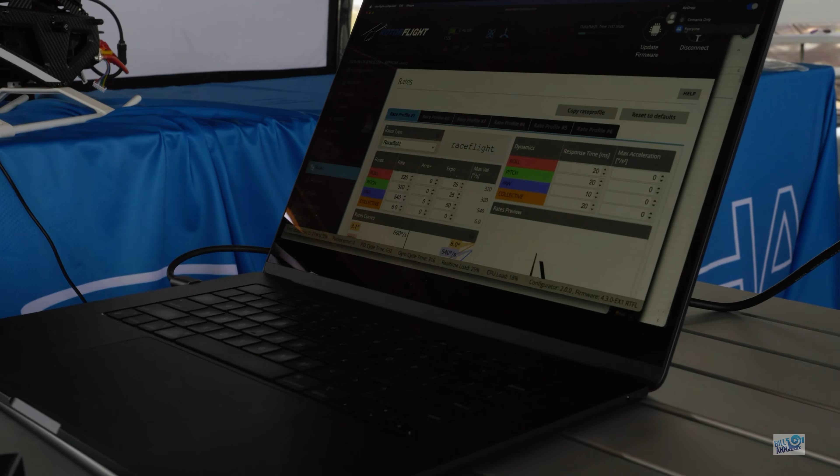So for the filter section, I just want to do a quick recap, if we actually have the time, because not everyone has seen the video and filter setup is very important. I'm just going to airdrop a little video over here. Not a video, a log. Robert's laptop, very good. And we're going to look at that log in the Blackbox Explorer, if it airdrops.

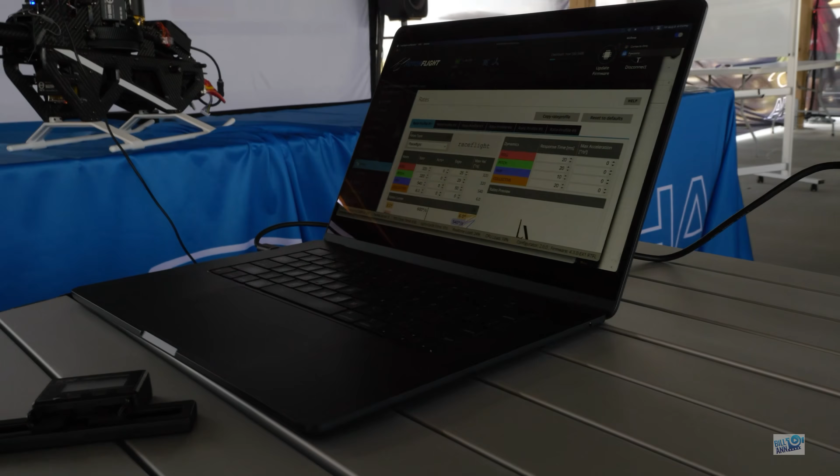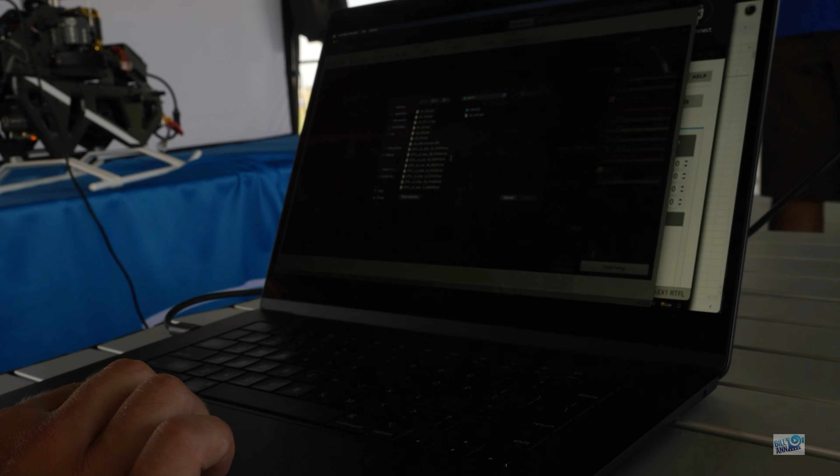Oh yeah, you need to accept it. Just like I said, this is kind of freestyle. Okay, can you open the Blackbox Explorer, please? Then I can quickly show them. Yeah, very good. Got it? Yeah, there it is. Cool. Can I pull this? Good. Okay, oh yeah, you already have things configured here. So I'm just gonna open the log that I just airdropped. Where is it? I would say don't disconnect it yet. Here, vibration. Okay, so filtering. Oh, I just dropped the thing.

I'll go fast. Okay, so the entire point of filtering, why are we doing it? You have a gyroscope in your helicopter and that picks up rotation rates. Pitch, roll, yaw. I actually brought my little M2 Evo to demonstrate this. So you have a gyroscope that picks up pitch, roll, and yaw. The annoying thing about this is it also picks up vibrations from the main rotor, from the tail rotor, from the motor, from the gear train. And these vibrations do not contribute to flight performance, so we want to get them out.

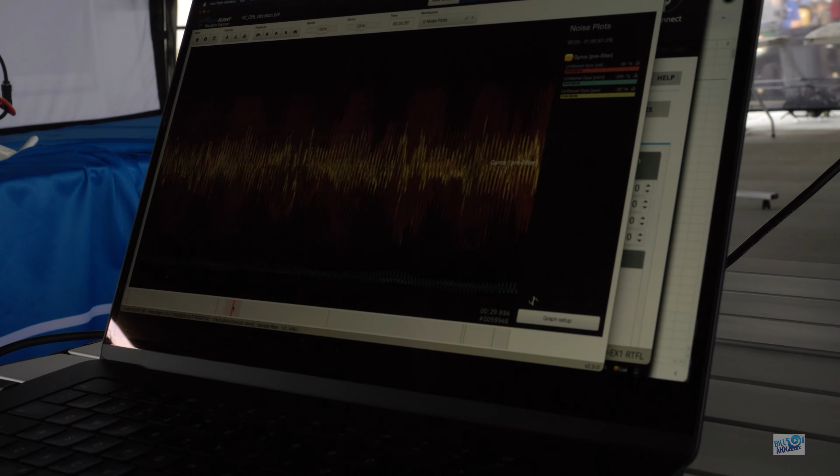I am just going to stick tracking. This should have what I need. I'm just going to show you. Okay, so we are going to look at our pre-filtered gyros. Just want to show you what this looks like. So this is a flight that I did where I just flew. And you can see, maybe, that this is very, very noisy. You can see the yellow trace. It goes up and down and up and down.

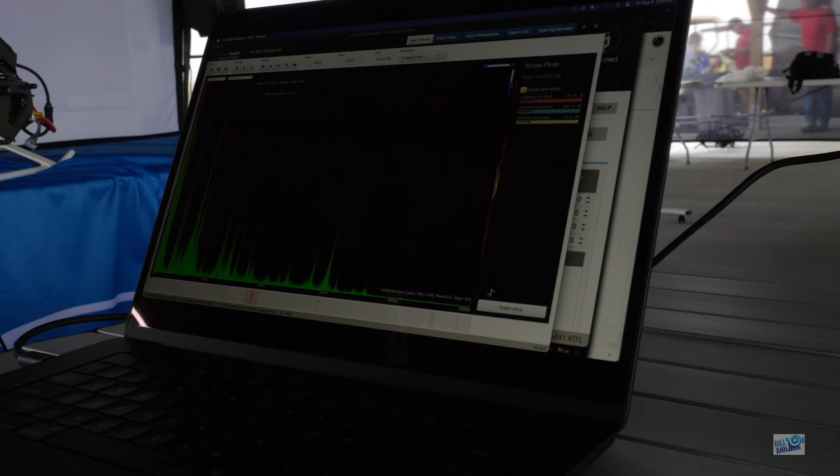If I actually click this, I get this. It is kind of hard to see. I will try to scale it up a bit for you. You can see all these peaks. These peaks right here, they're all vibration. Some from the main rotor, some from the tail rotor, some of other things. And the idea now is to reduce these to zero.

So if I just add the filtered gyros, I can show you what it should look like after this. You can see all the peaks are gone. And that is the idea behind filtering. We're leaving all the flight movement in the gyro signal, and we are removing all the noise. I explained this a bit more in depth in my video.

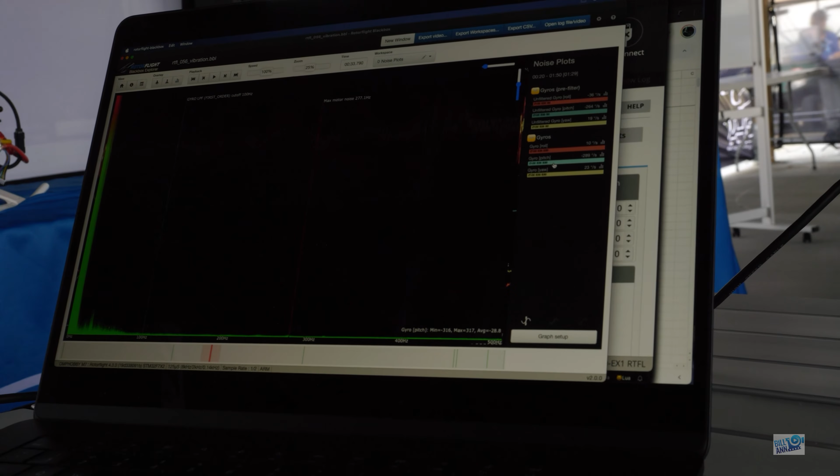All you need to know is if you have a helicopter that has a main rotor and a tail rotor, you come into the gyro tab and you're going to basically do what's already done here. You want a general low pass. A low pass is a type of filter that just cuts off vibration above a certain frequency. So for example, you have a, I don't know,

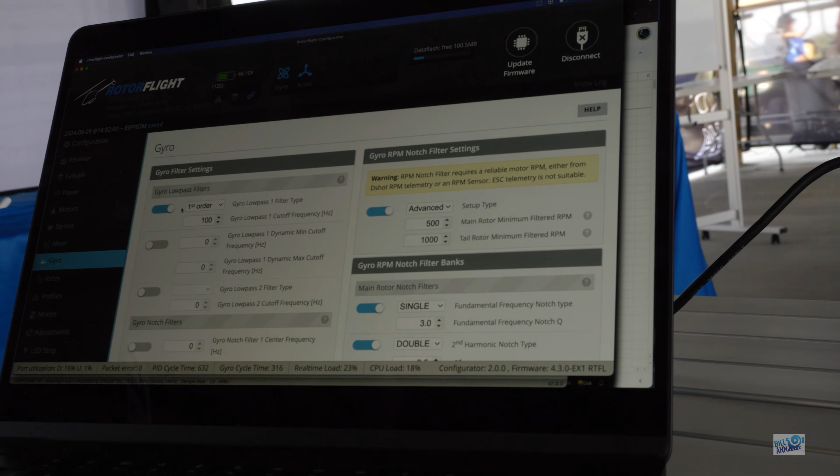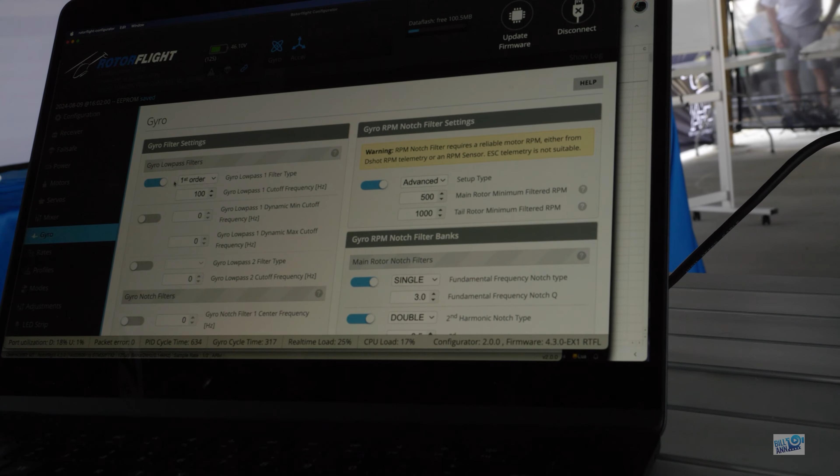0 to, say, 15 hertz range of flight vibration. Then above that, somewhere starts the main rotor, maybe 30 to 60 hertz. And then the tail rotor starts at like 100 hertz or something. And this just cuts off all high frequency vibration that you don't want. So if we, oh, he has all that stuff disabled. So I'm going to go back manually.

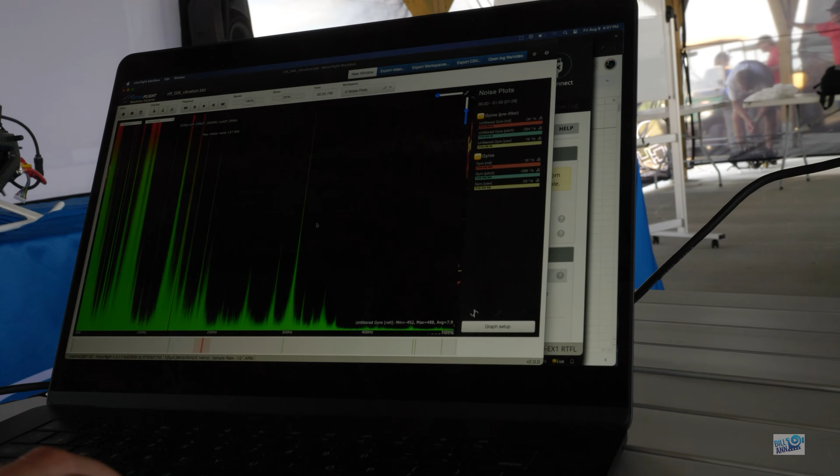So in the frequency range, you might just cut off maybe, yeah, here, gyro low pass filter. Everything behind this line will be cut off. It is a bit more complicated than that, but you can imagine it like this. Then we have the dynamic notches.

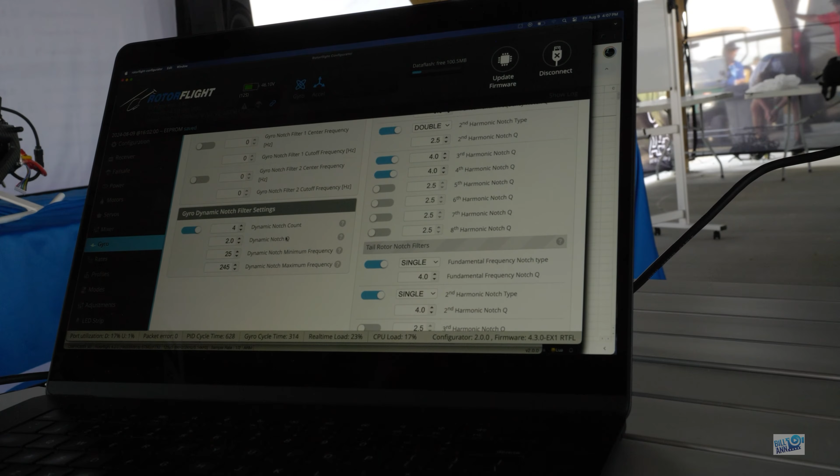Dynamic notches, they're neat because they actually seek out frequencies that stand out the most, lock onto these, and filter them out. The defaults of 4 notches at a Q of 2.0, that's amazing. You can leave that in. Nothing needed to modify here.

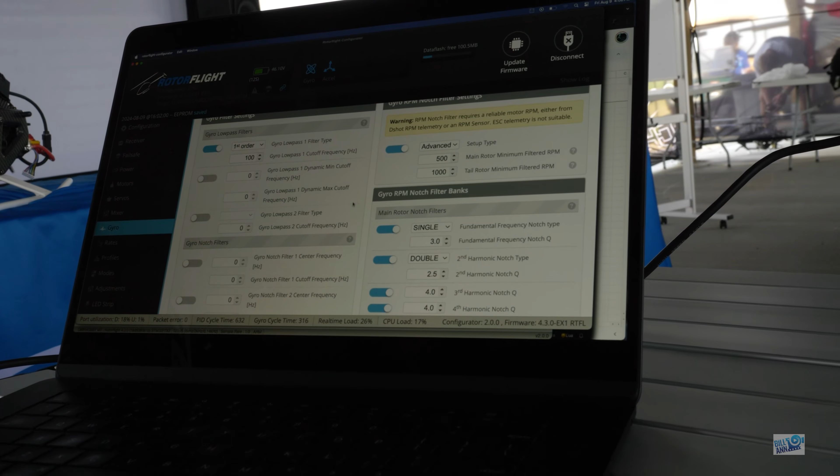Now, every modern ESC delivers an RPM signal. That is a neat little wire that comes from your ESC, plugs into the flybarless unit, and tells it how fast the motor is spinning. And the thing that Bob showed earlier, where you set the gear ratios, that also tells the system how fast my main rotor is spinning, how fast my tail rotor is spinning.

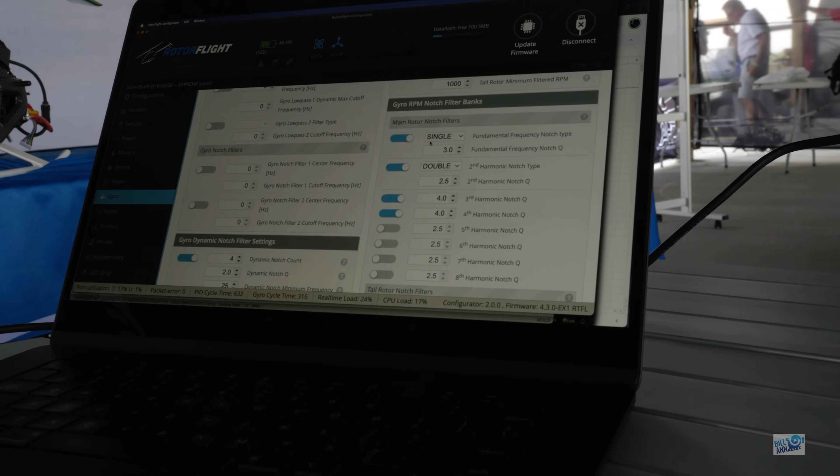And based on that, we can also filter these vibrations out. So what we have here are RPM-controlled notches. Main rotor fundamental frequency notch is the 1 per rev vibration of the blade of the main rotor. For example, if one of your blades is a bit heavier, that is going to create a vibration that comes around once per revolution of the rotor. That filters that one out.

Below that, you have the second harmonic. The second harmonic is cyclic resonant flap. So if your blades flap up and down during the revolution, it filters that out. That is actually one of the main contributing factors of helicopter noise. Third and fourth harmonics are just different bending modes of the rotor blades. It doesn't really hurt to enable these. Most main rotors will show a third and a fourth harmonic, so just turn these on and you will be fine. That's these 4 here.

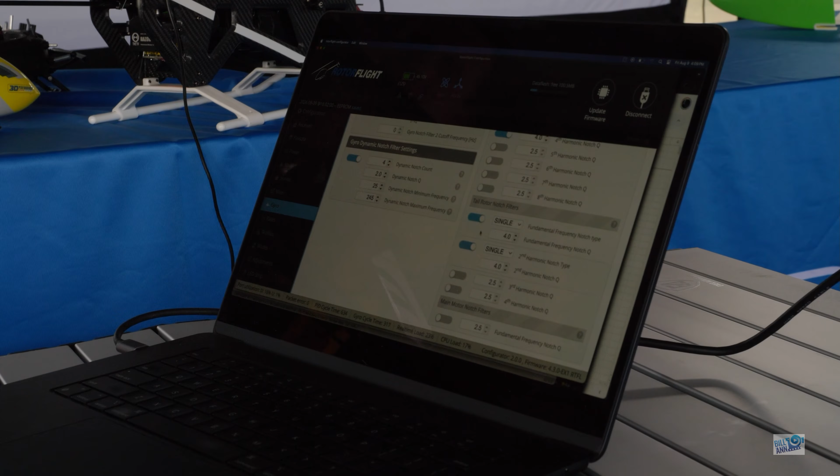Then you have the same for the tail rotor. The tail rotor, as I said, is higher in frequency. For this example, on the M7, it is 5 times faster than main rotor, so the frequencies are 5 times higher. You can just turn on the first and the second notch, and it'll take care of this.

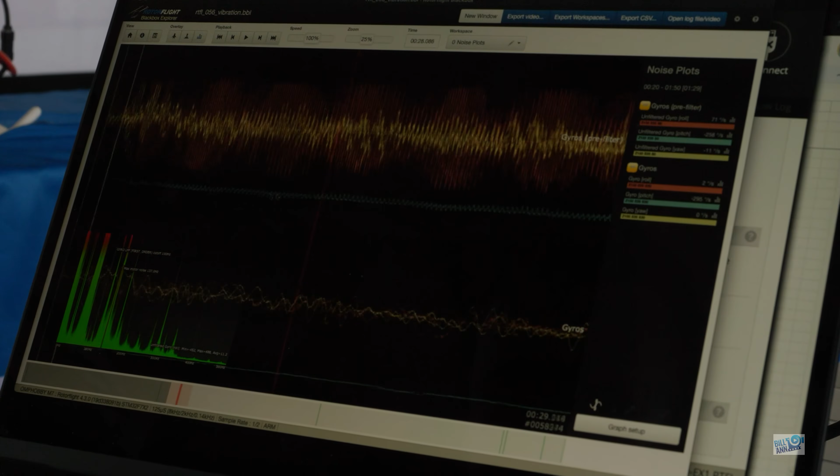How you can test this is by just going up and doing a flight with logging. And in the log, you're going to look for continuous flips. So you want to do continuous flips. You can then limit the range with I and O. And then you will get a vibration spectrum that shows you what your helicopter is doing in continuous flips.

You probably cannot see this very well. We have 100 hertz here, 200 hertz here, 300 hertz here. Everything that is really important to this is below 100 hertz. So I'm just going to scale this over a bit so you can see it better. Now the maximum is 167 hertz.

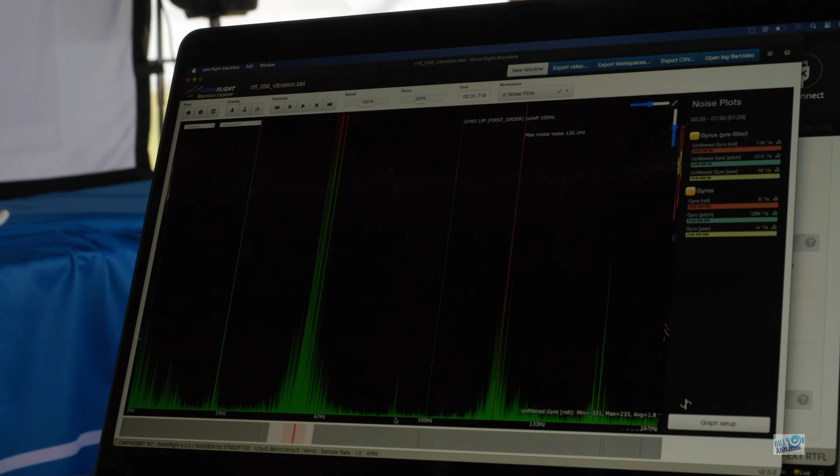You can see one peak, that is the main rotor fundamental vibration. This wider peak, I hope you can make it out, is the second harmonic from the resonant blade flap. Here is the third harmonic, this is the fourth, and here starts the tail rotor. And after filtering, it should look like this. All the peaks are gone, and you should be good. If that's the case, we can continue on to PID tuning, which is probably why most of you are here.

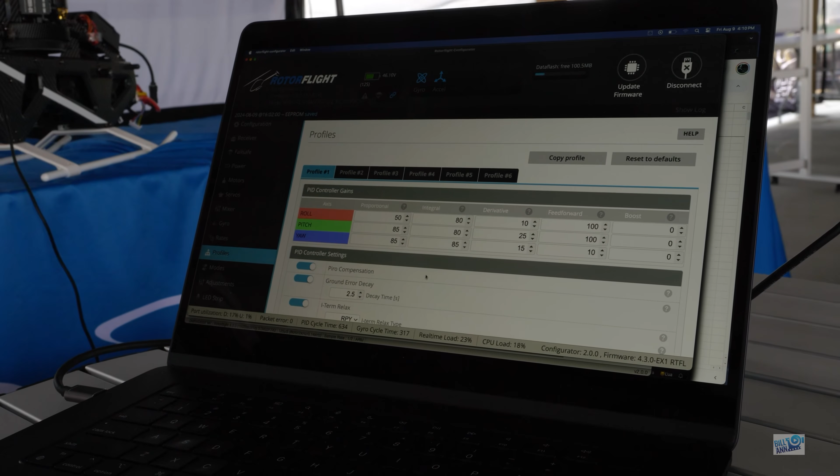PID tuning starts in the Profiles tab. You have this menu. It might look intimidating at first, but it really is not. I have 5 minutes to do this, oh boy. I'm going to show this up here. You have proportional gain, that is your P gain. You have integral, that's your I gain. You have D gain, you have feed forward, and you have boost. One more gain that you will need is the high-speed integral. That is down here. It is not in the main section. We'll also need this.

Okay, so what do these gains do? The P gain is a general correction. It looks at the rotation rate of the helicopter and counteracts that. The I gain is an integral of that. Integral means it looks at the angle. So for example, if the angle of the helicopter is 30 degrees off, it gives an amount of correction X. If the angle is 60 degrees off, it gives double that. It's proportional to the angle of the helicopter.

D gain is a derivative of the rotation rate. So it looks at the acceleration of the helicopter. Helicopter is hovering, nothing is happening. Helicopter is rotating, nothing is happening. But as soon as you give an input that changes the rotation rate of the helicopter, for example, from a hover, you accelerate, or from a rotation, you stop, the D gain counteracts that. Why is this important? Because it acts as a damper on the helicopter.

Feed forward is pretty simple. If you give an input, it just puts that input right through to the swash without any control logic. Boost is basically a derivative of your stick. So if you move your stick, it gives a little boost to the swash plate so the reaction becomes sharper.

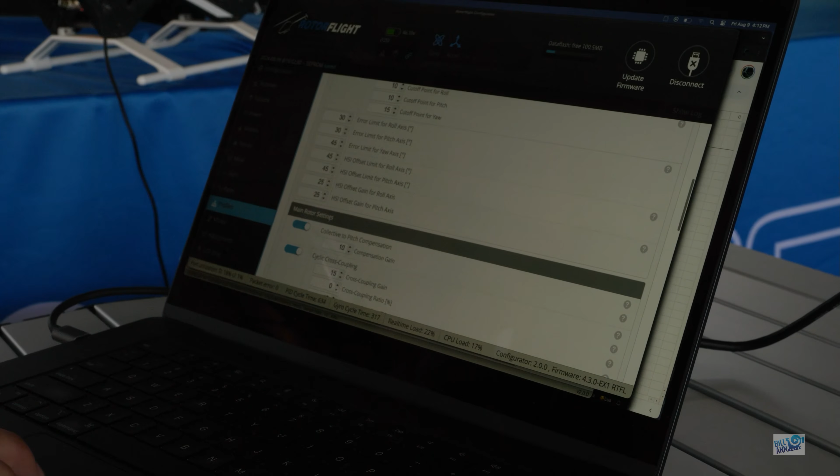And the high-speed integral, which I mentioned earlier, is especially important for fast flight. It basically makes it so that if you fly fast and give big collective inputs, the helicopter does not get into a porpoising motion, but climbs and drops in a straight line. So, how do you tune this? Because this is the most crucial part.

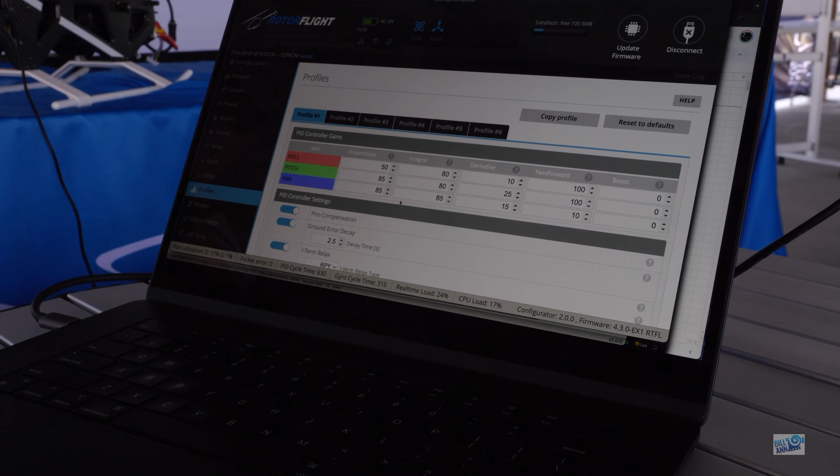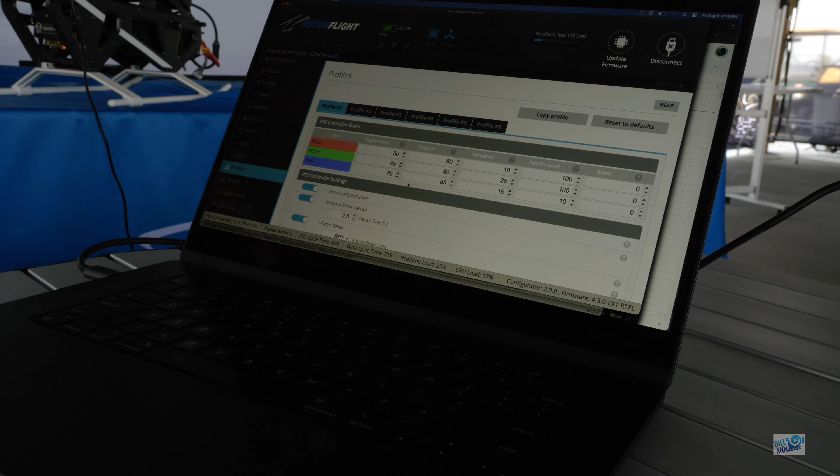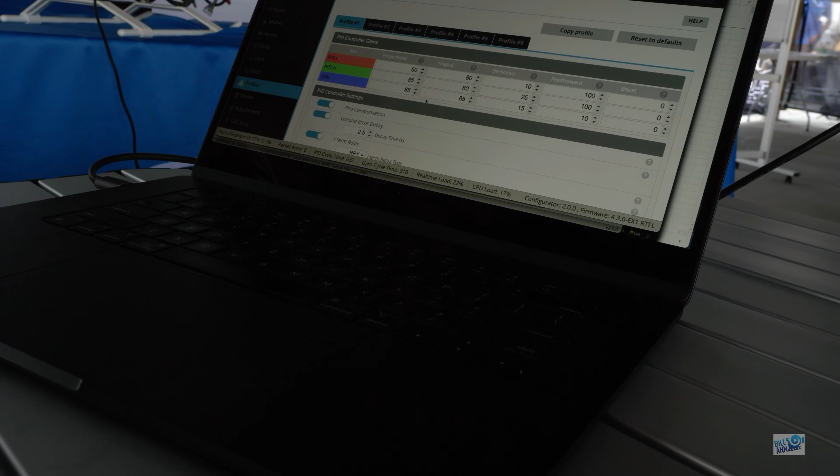From the defaults, you will have D, I think, 10, 20, I don't know. These will be too low to fly, so you raise them. How far do you raise them? Assuming your filters are good, you can raise them to like 60, 70, 80. And by the point you're there, what you want to do is you want to simply climb and pirouette to the right. And if the helicopter starts shaking during that, you back off a little.

Why do we do this? By climbing, we increase the inflow of air into the disc. That in turn increases the aerodynamic gain of the rotor blades, makes them more agile. So any overgains will show up first in maneuvers like this. And also because we're yawing right, we're increasing the rotor RPM because the governor does not know we're yawing. So that will tell you your maximum D gain.

While you increase your D gain, you will notice that from being very wobbly, like defaults on Rotorflight will not stop well on the elevator axis, it will go to being more crisp and not wobbling as much. And then it will become slower to react. That is okay, we're not done yet. So once you have found your maximum D gain, climbing up, it starts to wobble, back up 10, 15 points until it doesn't do it anymore.

We are going to tune feed forward. Why? Because we now have a flyable helicopter, and feed forward plays a crucial role in how the control system reacts.

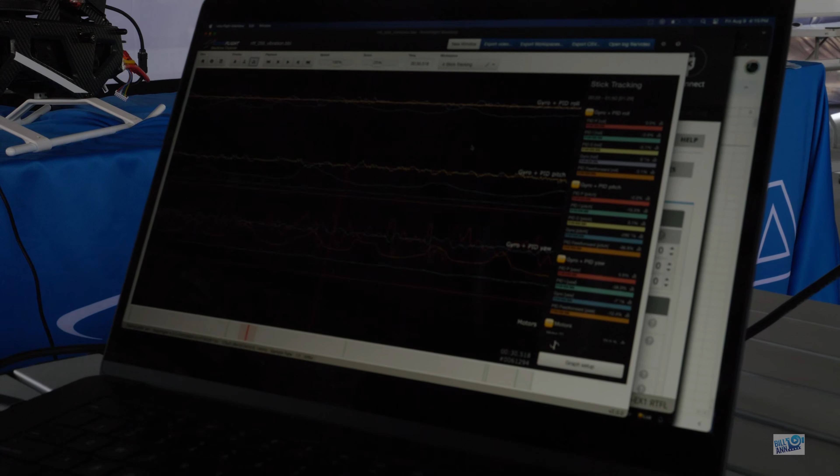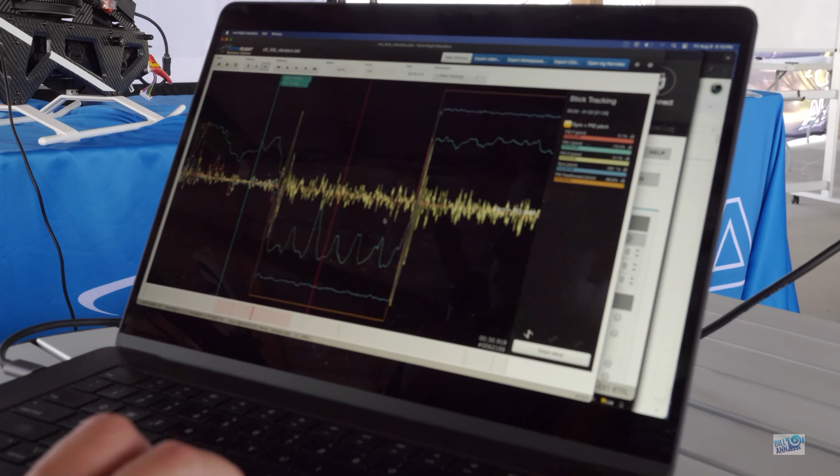Nope, you're not turning off on me now, because I need this one. Let me see if... stick tracking, yeah, that is the one I want. Okay, I just need a section of continuous flips again. Let's say we do the pitch axis. Okay, this is pretty zoomed in. Let me zoom out. Okay. You barely can see this, but if you look right down here, there's a trace. Maybe you can see this.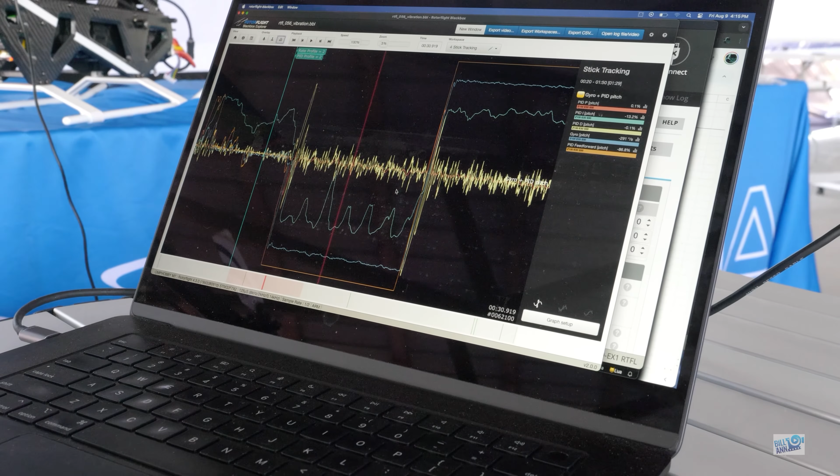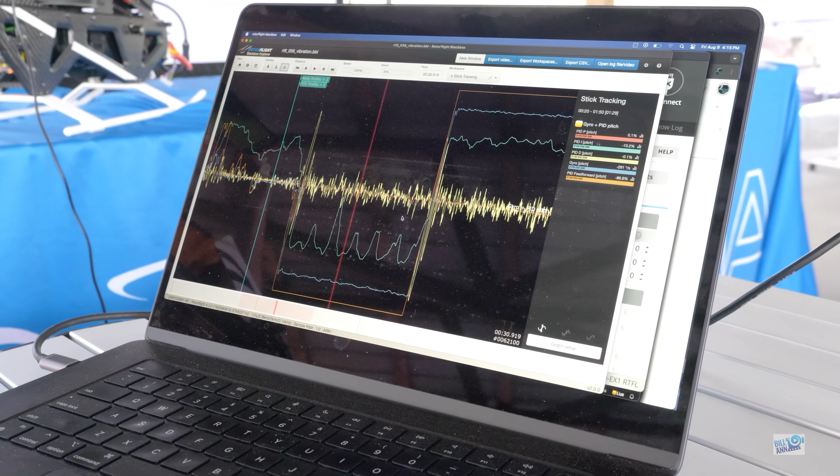That is my integral. We remember the integral looks at the angle of the helicopter and corrects it if the angle is not correct. So what do we do with our stick? We command a rotation rate. Or in other words, an angle change. So this integral wants to act if the helicopter does not rotate the way we want it to. There are some drawbacks to having the integral charge when we give inputs.

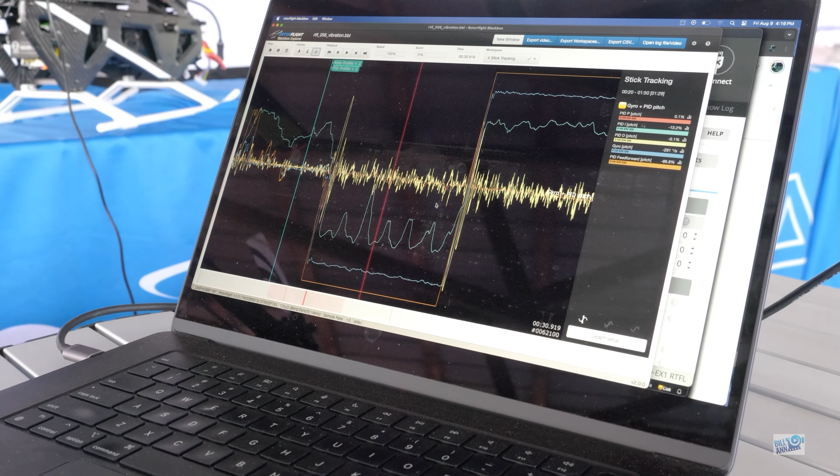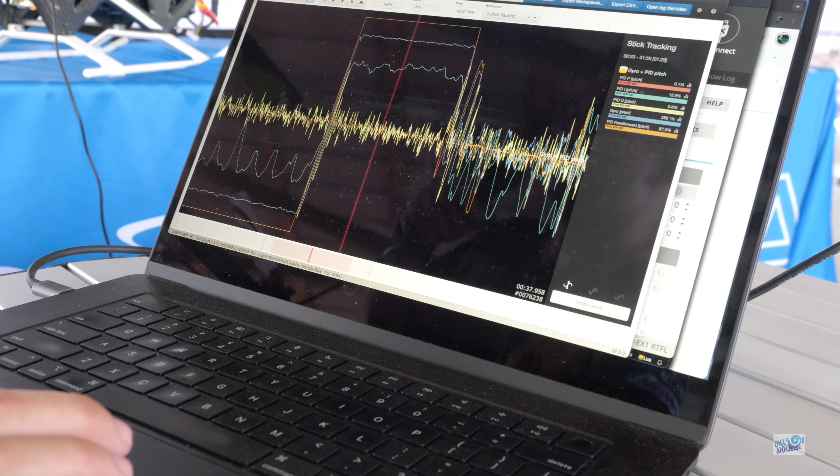So we want to tune feed forward so that the integral stays at 0. Basically, we make the helicopter flyable without the control loop, so the control loop has to do minimal work to fly the helicopter. In this example, I was just testing for vibration. My helicopter was not tuned well. You can actually see that the integral charges quite a bit up here.

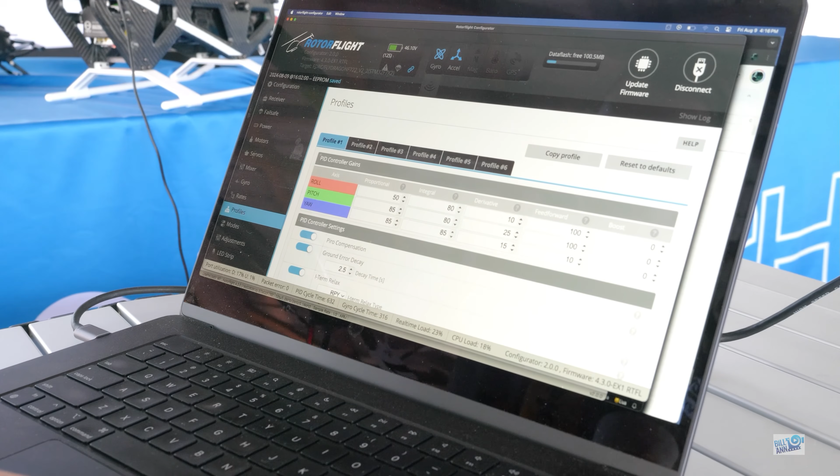And that would mean that for the flips I'm doing, because this is continuous flips, the feed forward amount is too low. So what would I do? I will go into feed forward and increase this value right over here until, during continuous flips, the line of the integral in the black box log... Oh, Bob has export turned on. That's why it looked weird. So this line would stay at 0.

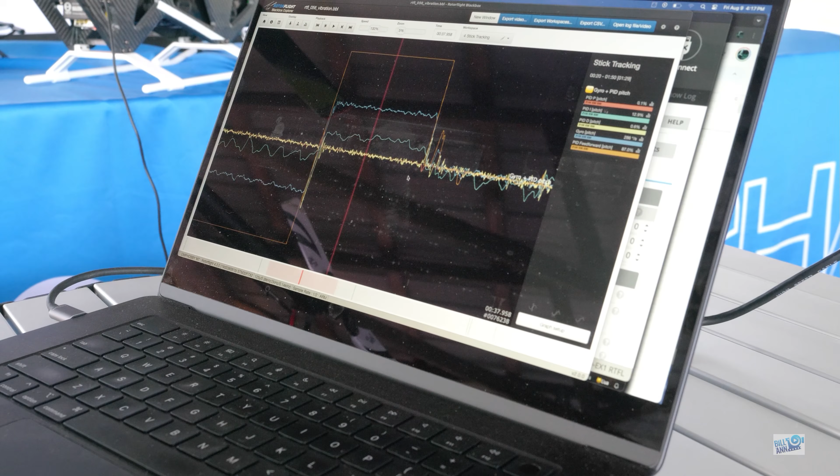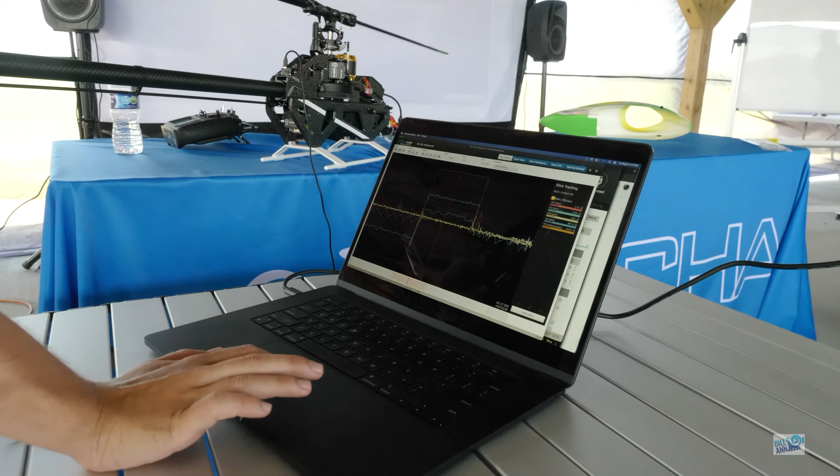Why is this important? Because then we have a helicopter that is basically flyable on feed forward with the correct rates-ish. It's not gonna react perfectly, but the control loop has easy play to keep it under control. Now that we have done this, we're going to look at P.

P gain is an interesting one because it reacts to the rotation rate of the helicopter. And you can basically interpret this as a spring that wants to push the helicopter into a turn. So if I give an input on my stick, for example, I command full forward elevator, the P gain is going to push the helicopter into this turn like a spring is pulling on the nose, like pulling down.

Now you also have your D gain, which looks at the acceleration and counteracts it. And these two now need to be tuned so that the reaction of the helicopter conforms to what you want. D gain works against the acceleration. P gain works for the acceleration. So you have a P to D ratio that you're now tuning to get the reaction exactly as you want.

So you really just take your transmitter and jab the stick. And then you look at how the helicopter reacts. If it feels like it overreacts, you have too much P in the system because, again, that pulls the helicopter into the turn. If it feels sluggish and slow, you have too much D in the system, which damps the reaction of the helicopter. So by adjusting P gain, you can now tune the reaction of your helicopter.

How many of you have flown a V-bar?

Okay, that seems like most people. Do you know the style parameter? Have you ever wondered what that does? It is just PD ratio. It is exactly that. So if you increase style on V-bar, you're giving it more D, less P. If you drop style on V-bar, you're giving it more P, less D.

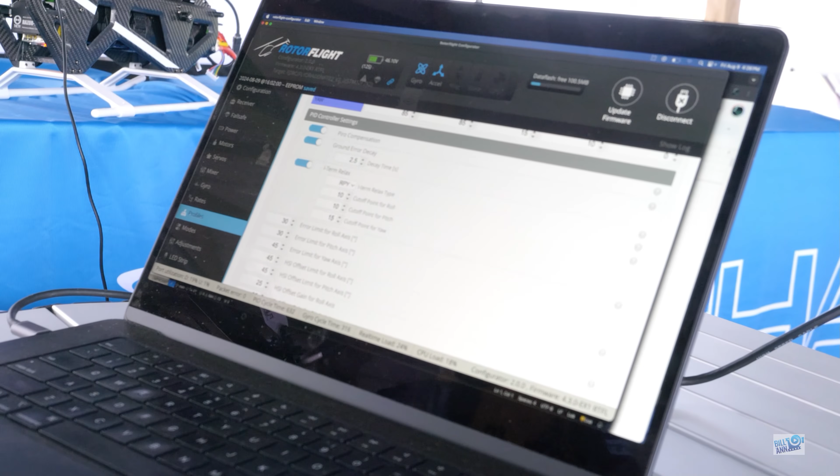This little field right here, the I term relax, comes in. If you have strike back on any axis that you cannot eliminate with the other tuning parameters, you want to lower your relax. Joanne is going to kill me for this. He hates relax. I found it necessary on my helicopters. So if the tail just stops and strikes back, you lower the amount of I term relax until it stops. I'm not going to go into why that is. It's just a filter that you put the stick signal through, compare it, and then inhibit the charge of the I term. But yeah, just drop relax and it'll be basically fine.

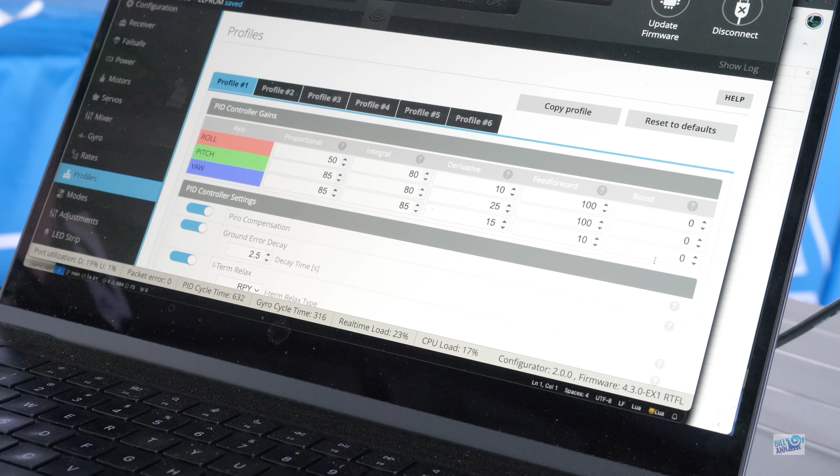Same thing also on the cyclic. If you encounter, for example, strike back when going fast and giving an input, and it just pitches up and then pitches back down, that is also when the relax is too high, so drop that a bit. And yeah, for the tail, the last thing you can do is adjust the boost amount, just like on the main rotor. It's just a derivative of the stick, so if you want it sharper, you can increase the boost to give it that extra bit of pop. But given how sharp Rotorflight's tail is, I've never actually used that on the tail.

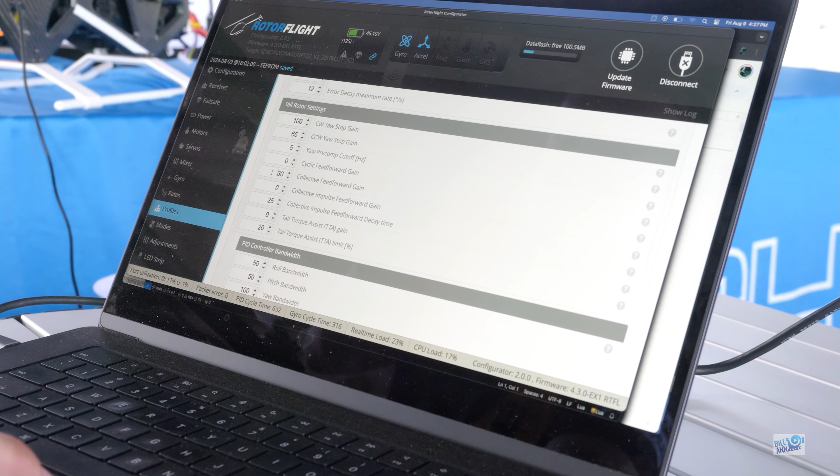Last thing for the tail, if you come all the way down here, you will find the pre-comps. And the only pre-comp you really need is the collective feed-forward gain. You increase that until the tail does not wiggle anymore on collective. Like, for example, if you punch in collective and the tail wiggles out a bit to the left and then comes back, that one needs to go up, collective feed-forward gain. It's the same as torque pre-compensation on a V-bar or any other flybarless system. Every single flybarless system has it, basically. So you go from there until it does not do the little shimmy. If it's too high, it will actually strike a bit to the right first and then come back. So tune that until it just climbs out straight.

If your tail is very asymmetric and has more thrust in one direction than the other, oh, this thing is on. So for example, the M7 is actually like that. It has like 44.5 degrees against torque and 31.2 degrees supporting torque. You might actually find that your pirouette stops are different in each direction. Then you have the stop gains, clockwise and counterclockwise stop gain. And you can just tune them. If one pirouette stop is softer, you raise the stop gain. If one is too hard and wags a bit and the other one is soft, you just drop it a bit.

And I guess that is basically it for getting a basic tune going for your helicopter.